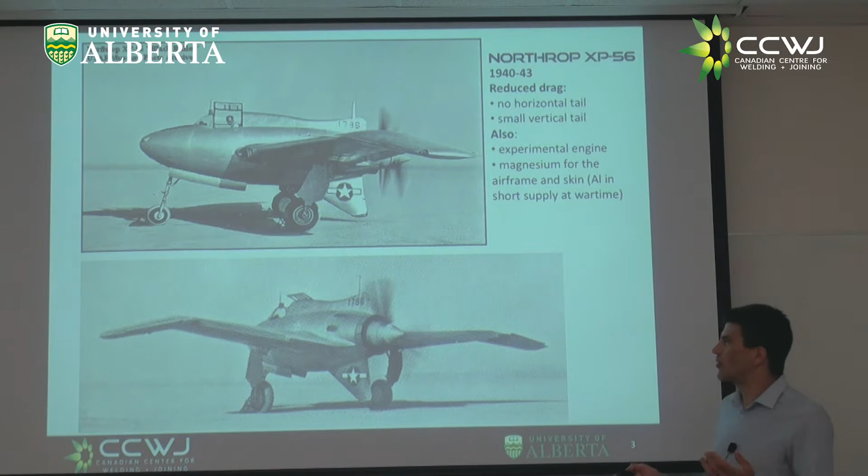But guess what? They had no way of welding this. They were barely, World War II, I showed you how people didn't even know how to weld ships. And now they wanted to weld planes, wanted to weld magnesium planes. All right, anyway, they figured it out. Of course, this plane didn't make it to the battlefront.

Look at this other one. They thought, okay, the idea we still are not sure we're going to use in battle, let's take it to the next level and put jet engines. And how about if we put the pilot prone? And this is funny because they put like as if it is the Germans trying to ruin like an American bomber. But in reality, these are the Americans. And the plan was this plane had no machine gun, had no missiles, had no nothing. What you would do with the pilot going first head would break the tail of the other plane just by ramming into it. And of course, the pilot was assumed to survive and hopefully land.

Well, let me tell you, not only they didn't build this plane, but at one point they realized that maybe having the pilot go head first into crashing into another plane is not a good idea. So there's another iteration of this plane in which the guy is sitting. Still a horrible idea, and still the plane is made of magnesium. But I guess if you're going to be suicidal, you don't care if it's going to corrode, right?

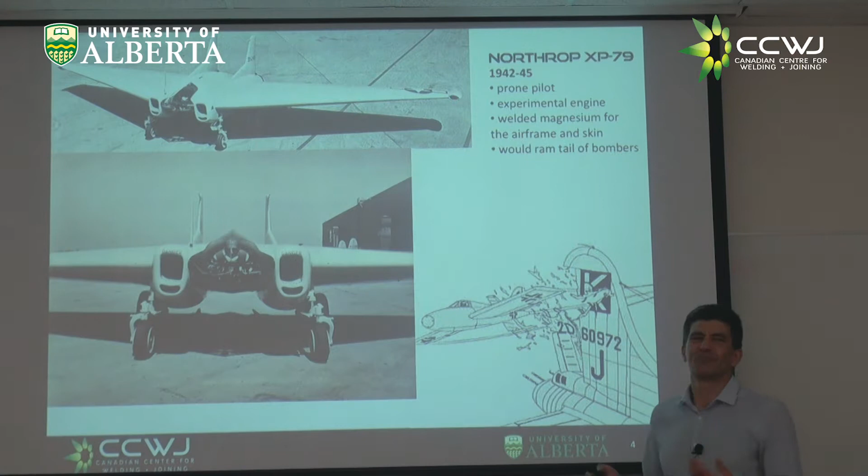So anyway, they needed to put this together. And what did they do? They invented what today we call TIG. And this was invented for welding this plane. Today, this is one of the essential technologies we use in this profession. If you say TIG, everybody will know what you're talking about, because everybody at NAIT, SAIT, and everywhere else, they live and die by TIG.

And of course, I'm saying TIG, but I write GTAW. That is the official name. Some people say GTAW. Again, welding is full of mysteries—who came up with this name and thought it was a good idea? So this, if you go to SAIT or NAIT, this is among the last things they'll teach you, because it's very difficult to do by hand. But it's the easiest to explain. So I decided to start here because it's easy to explain.

So in this process, you have the electrode. You have the arc of arc welding. This J thing here is the arc, and the arc goes between two electrodes. Here's one electrode, and the other—in reality we don't call it an electrode anymore, but that is the plate.

Remember when we talked about how if you have molten metal in contact with the oxygen of the atmosphere, it's going to end up looking like Swiss cheese? And I know this from experience. So you put inert gas. This K here is the shielding gas, typically argon or helium and argon, but typically it's a pure inert gas or a combination of pure inert gases.

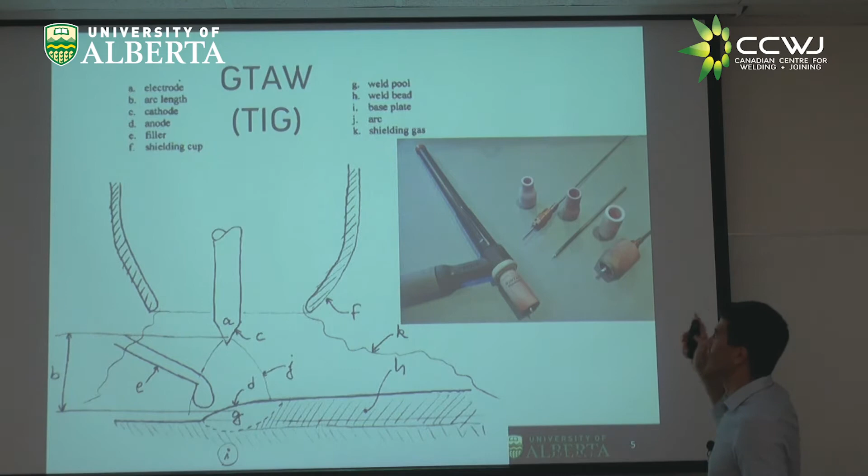So gas tungsten arc welding, which I'm going to call TIG. So I already mentioned the protection from the melt. And the reason I put this in this sequence is because I'm going to show you a ton of welding processes, and each process has a way of protecting from the atmosphere that might be just like this or might be different. This is an important aspect.

The filler material—you can have no filler. This would be an autogenous process, in which the joining of the atoms is done by the melting of the base material itself; you don't add anything else. But you can have external filler, which could be the same as the base, or very similar to the base and would be homogeneous, or could be different and would be heterogeneous.

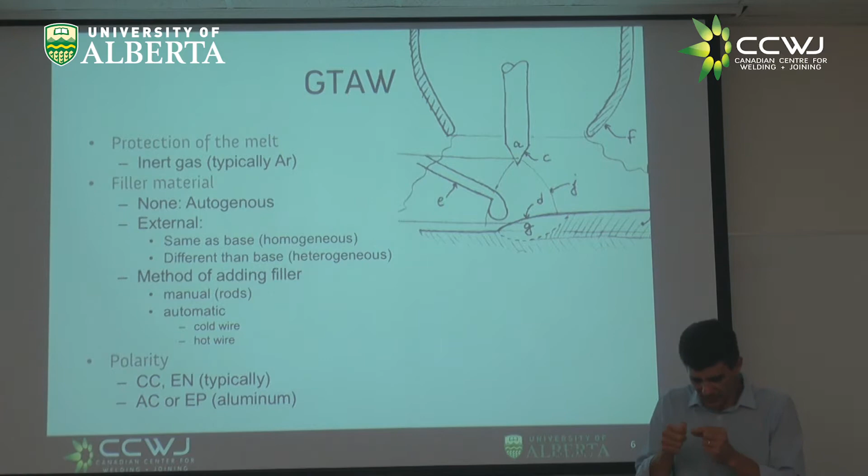You can add filler. The way you would add this filler could be manual. You make a little rod, and the welder goes like a sewing machine—they go with a TIG, melt a little bit of the plate, bring a little bit of wire, melt plate, wire, melt, and you see them working like this. It's quite awesome—that's manual, with a rod. You're going to see when you name the electrodes, they are called ER70S, for example.

The R stands for rod because you can use it for TIG. Or it can be automatic. You can bring this from a machine, and it pushes the wire for you.

If you just push the wire in without touching the weld pool, that's called a cold wire. But if you make the wire touch the weld pool, the molten metal there, the Joule heating from another power source circulating current through it would heat up the wire, and that's called hot wire.

Polarity. You're going to see lots of things about polarity, and this matters a lot. When I started my research in welding, I thought, who cares about polarity? But I'm going to prove to you later on that polarity matters a lot.

Typically in TIG, the polarity is electrode negative. There are good reasons for this, which I'll teach you later. The electrode is negative, and you typically use constant current, not constant voltage.

In constant current, the intensity of the arc—remember the arc is very hot and generates a jet about the same speed as a jet plane—this jet has about the same intensity if it's constant current. So you can be a little closer or farther from the weld, and you always have the same jet.

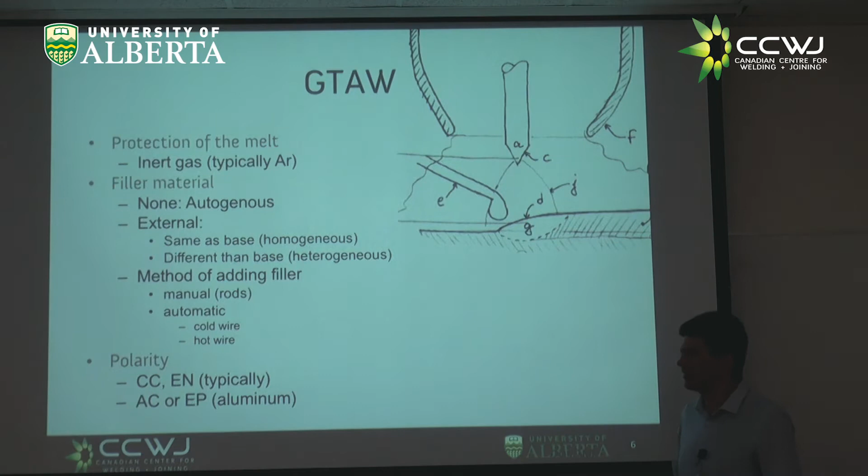Other things: in aluminum, sometimes you have AC, electrode positive, very, very seldom, only if you have no other way. AC means alternate current or variable polarity. You're going to see in the lab what happens with aluminum.

Aluminum isn't that it doesn't get rusty and doesn't oxidize—aluminum does oxidize. What happens is it has this protective oxide layer. Now, when you weld, what you weld is the metal, not the ceramic, the oxide layer. So the oxide layer is your enemy.

For reasons people don't really understand, when the electrode is positive and the plate is negative, that breaks the oxide layer—nobody knows exactly why. But if the electrode is positive and the plate is negative, you get what's called a cleaning effect in aluminum. In steel, you don't really need that, because steel doesn't have this really strong oxide layer on top.

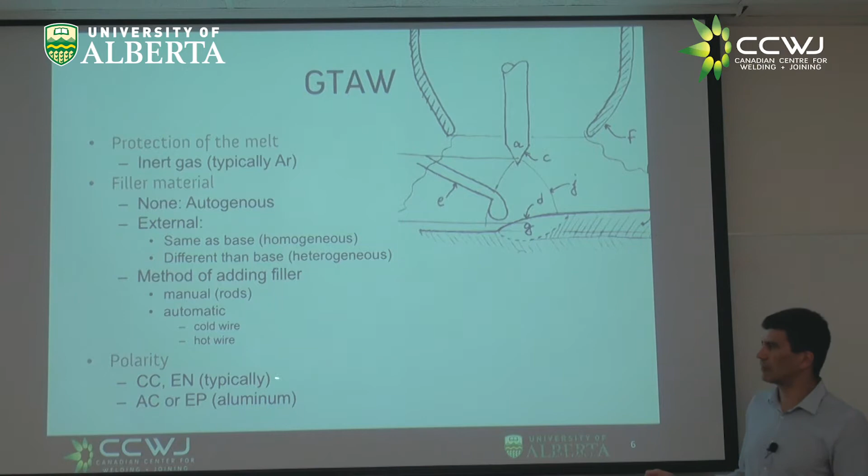So you have different levels of AC, and different levels of cleaning of the aluminum. You're going to see that difference between steel TIG welding and aluminum TIG welding. As I talk about polarity, I'm leaving aside many details about the physics of plasmas, which we will discuss. For now, take me on faith about these polarities.

What characteristics does TIG have? You require high manual skills. I'll give you an example from our lab.

I'm the professor, but I didn't have the best car in the lab. The best car belonged to one of the students who was a welder. He would weld during the summer and be an engineering student the rest of the year. The money he made welding during the summer was good enough to buy an Audi, pay his mortgage, pay his mom's mortgage, and go on fancy vacations. Isn't that crazy? And that's because he was a qualified TIG welder.

That is the highest level. So when you make pressure vessels and those, you use a lot of TIG, and very few people are good enough. Those are paid like surgeons. Isn't that crazy? So you can make sophisticated welds with this.

TIG is a little bit like a scalpel. You can do accurate operations. You can do small details.

So if you're making a race car, it's TIG welded. Parts of airplanes, TIG welded. Rocket engines, TIG welded. You can have very high purity here because everything is very controlled. You're not bringing in new wire, you don't have fluxes, and you don't intentionally introduce any oxidizing component.

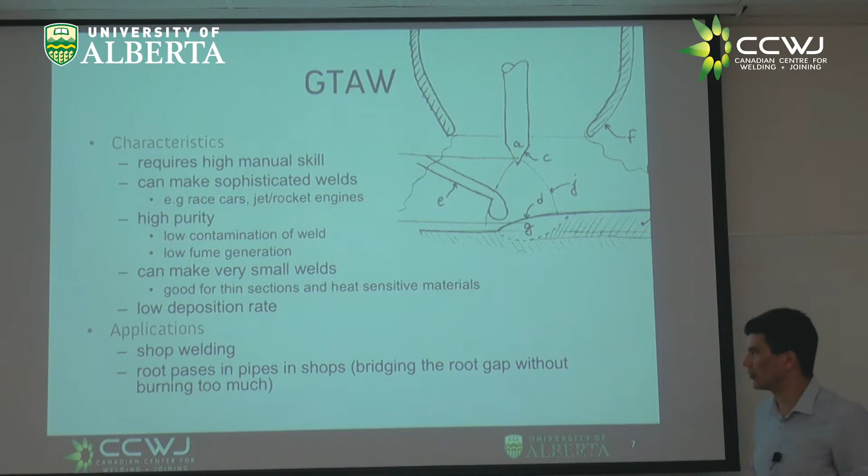What do you use it for in this province? A lot, the root pass of a weld. At the weld, the bottom of a V groove, you have the root, and the root is relatively thin. So if you come like an animal with something that has lots of heat, you might ruin it. So with this, you have really good control of how you're going to attack that root. And that is TIG.

Yes. Oh, yep. Hold on. I forgot, I need to give you sound here. Now I'm going to show you a video that is descriptive of TIG, and I believe we have sound. I'm pretty sure we have sound somewhere, as promised here.

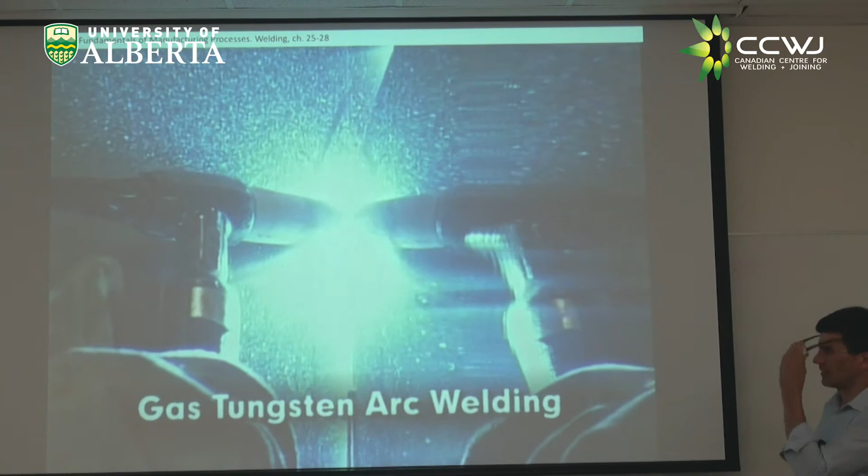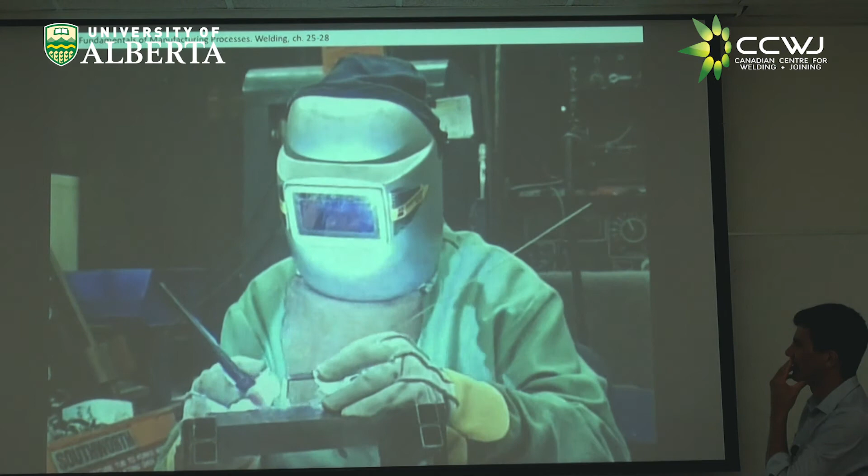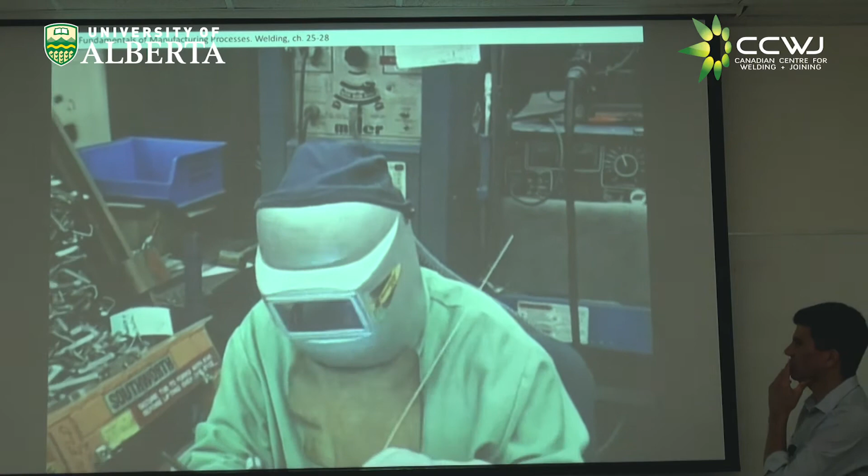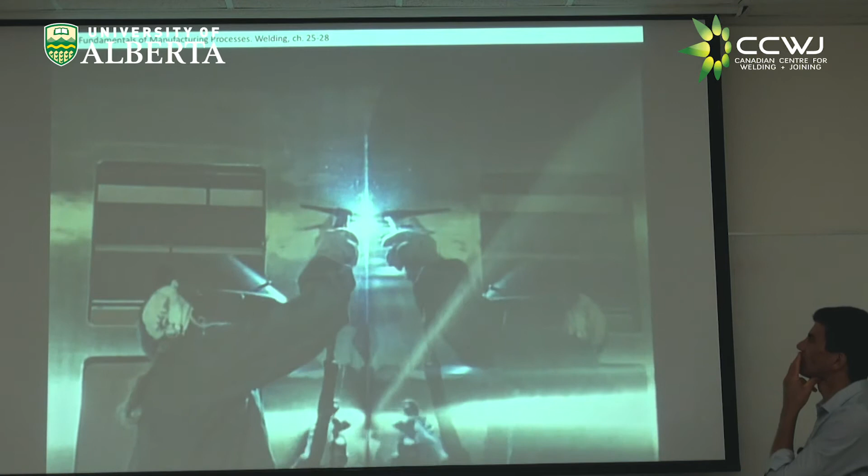Gas tungsten arc welding uses a non-consumable tungsten electrode and externally supplied inert gas shielding. The most common shielding gases used are argon and helium, and mixtures of the two gases. All types of steels and most non-ferrous metals can be welded in all kinds of joints and positions. Depending on the application, workpieces can be welded without a filler metal or welded with a filler metal supplied separately to the joint. Gas tungsten arc welding process employs either an alternating current or direct current power source, depending on the type of metal to be joined and its thickness. Some power sources provide pulsating direct current with variable frequency. These adjustments allow better control of the molten weld metal when welding thin sections and when welding in other than the flat position.

All right, there you go, like an introduction. This is a video typically aimed for the trades, but at least you get to see how it was used. By the way, when you see the people in our province, they look a lot more skilled. They were just putting the torch against it, you don't do that. Our guys are really sophisticated.

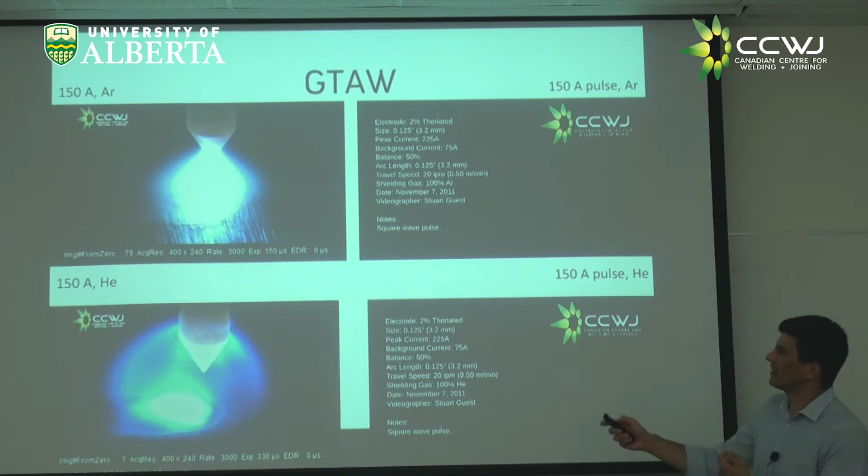Okay, so let me show you some videos we took in our lab of TIG welding. Here, this is 150 amps in argon. I'm going to put them all here, here, and here. So these are videos, they look like photos, right? Because nothing is moving. But in this one, you can see how it is. Here in this one, you get to see how it changes.

Remember when we talked about constant current or constant voltage, and then I mentioned advanced waveforms, because now that the things are like a computer, you can tell it to pulse high here and low there, high and low. So in this case, we're just pulsing high and low. When the current is high, the arc swells up because it's taking all this energy through. When the current is low, it gets smaller. I'll tell you more about pulsing in a second.

You see this other one that looks ghostly? This is in helium, pure helium. That's very uncommon. Sometimes you would use helium, but there are pros and cons. Helium is very expensive and non-renewable. Argon comes from the air. You get to see how the arc looks quite a bit different. The physics of the helium has significant differences with argon, and we're trying to understand those right now. The physics of the plasma are not so well understood.

Why would you want to pulse? For many reasons. One of those is aesthetic. There are some types of welds in which people like to see what they call a stack of dimes. Imagine you have a stack of dimes and you tilt it, and it goes like the scales of a fish. Some people like that finish. So if you pulse it that way, you get that finish.

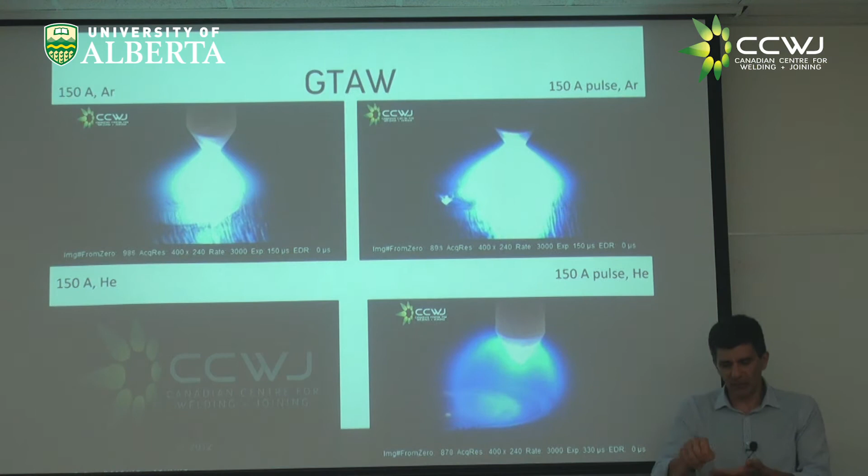The other reason is sometimes you want to have good penetration, but not too much heat. So every time you pulse, it's as if you dig a little bit, and when you don't pulse, you're not digging. So when you pulse, it would be a sequence of spot welds, pretty much. Those are decisions that are made depending on considerations of aesthetics, heat input, or preference.

In this class, you're going to see many of the aspects that help you make those decisions, although very often they're kind of mysterious in the way they are taken.

In TIG, there's something called the gas lens, and it's interesting - we have one Mickey here, I believe. Who's that? You, okay, welcome. It's two. No, Mitch is there too. Three, Louis. Oh come on. Okay, so we can come out of the closet then, huh?

Remember I mentioned we want to separate molten metal and oxygen of the air, because that's bad. One of the ways is you put an inert gas, for example argon or helium, whatever.

Now, when you're blowing a gas, as you guys know, the flow can be laminar or turbulent. If you want it laminar, that's typically related to slow velocities. But if you have slow velocities, it means you have little gas. So some people say, oh, I'm going to give it really good shielding and open up the tap, and they're blowing argon like crazy, spending money like crazy. And guess what? It goes from laminar to turbulent. Now you're worse than before and more expensive than before, because you can do everything worse if you don't know what you're doing. Now, smart people realized that if you put something called a gas lens - which has nothing to do with a lens, I don't know why they call it that -

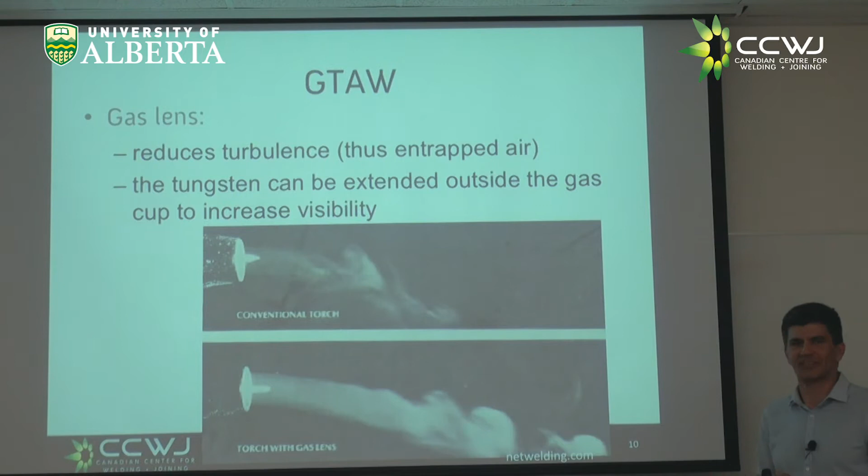All these things can take days and many thousands of dollars in delays and problems with the products. But it's not going to happen to you guys, you're going to be awesome. And by the way, they don't teach you all this when you learn to weld properly - they just teach you to weld. But this type of thing is for good welding engineers to know.

Remember what I mentioned - you can add the wire by hand, as you saw in the video, or automatically, feeding the wire from a feeder. One of these techniques is called hot wire, and this is a photo of the patent. Funny enough, this guy is still around - this looks like the Victorian era, right? But this guy is around. He's August Manz, who until not long ago was in charge of the AWS welding handbook.

And what did he invent? Here you have your TIG torch as usual, and here you have the wire they are adding - it's coming out of a spool, and the wire comes in. Now, what is not shown all too clearly here is that it says power supply and power supply. This power supply is a power supply for TIG - everybody has one of those because otherwise you cannot do TIG. But let's say we have two power supplies now.

We have power supplies like this in the lab, we have 2 of those. So you have an extra power supply, and now the current would go through this wire from the workpiece, the plate, through this stretch of wire. You see this little line here? This is super important. And then this other part here is called the contact tip and goes to a power supply. All these are big, beefy cables, this is a big, beefy piece of copper. This is just your everyday welding wire.

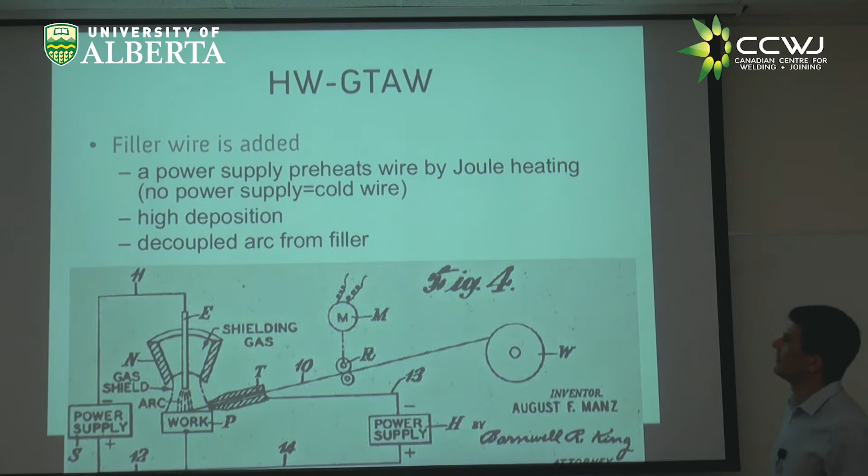All right, let me show you a video of this process in action. So this is a video from our lab. This is our TIG electrode, made out of tungsten. Tungsten has a very high melting point and also has a property of being thermionic.

Now, here you don't see it all too well, but you see this ghostly image here? This is the hot wire coming in. And you know it's hot wire - you see how it's already kind of molten as it is coming in? It's not coming in straight and strong. It's coming in already molten because you have the current moving.

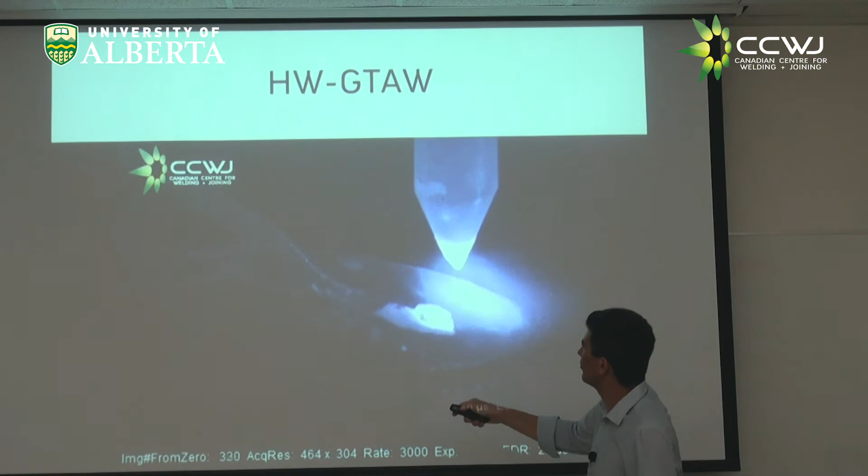I'm going to show you one more thing, and it should blow your mind. Look at the arc, yeah? Oh. You see? I want to know what's going on in there. What's going on?

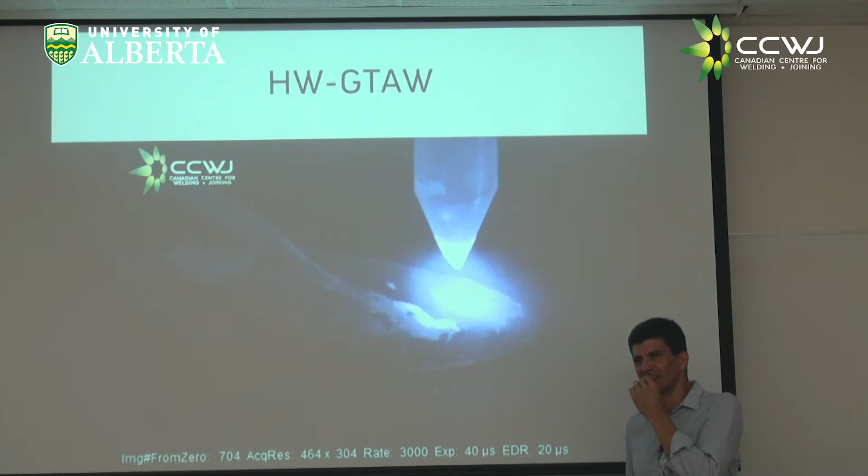Okay, who said that? Okay, you say polarity. What do you mean by polarity? Like you have 2 power sources, right? Match them so you don't make a short circuit. Right, but to be clear, you said polarity, but in both cases, the electrode here is negative, the plate here is positive, and that did not change the polarity.

Here, let me think. I believe here the wire is negative and the plate is positive. No, the wire is positive. Here the wire is positive relative to the plate. But the polarity did not change. What changed? But you're onto something.

So we have what is called arc blow, and it's an electromagnetic interaction. It's such a pity you guys didn't have electromagnetics, although a few of you did. So this is a story. This arc is fine, but here we have another electrical current. This is not going to have much of an effect on something that is so strong.

But this guy has a current, and this current generates a magnetic field. And the magnetic field interacts with this current and generates a force. And it happens that this is a pulsed power source - it's not variable polarity, but it's pulsed. So the current is going like that, I believe. So when you have this current interacting with this current, the two opposite currents repel each other. And so here the current is coming like this, and there it is coming like that.

They repel each other. That's called arc blow. This has not been a problem here, but very often, if your plate is magnetized or something like that, it's going to move your arc. And the welder has a really hard time, because if they want to weld this one point and the magnetic fields move their arc, they cannot do it.

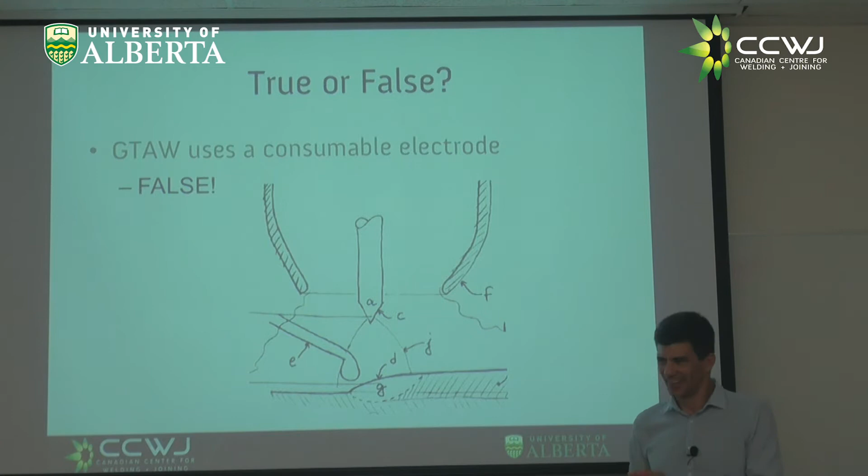Very interesting. Okay, true or false? Gas tungsten arc welding uses a consumable electrode. False, thank you guys very much. Of course, unless you're like me and you change the polarity. If the electrode was positive, let me tell you, you melt the electrode. But you shouldn't.

As you blow this primary gas at a pressure, you make an arc that is constricted. If you remember the arcs that you saw in the videos about TIG, they were like a bell - like a Liberty bell, big. But in plasma, because you're having this primary gas blowing very strongly here, you constrict the arc, and the arc becomes even more of a scalpel. Now it becomes so narrow that it can compete with laser. It can be very, very focused.

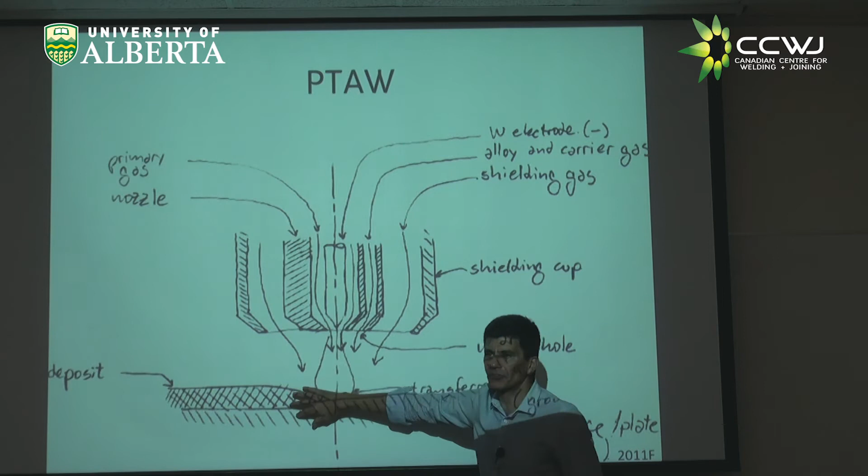Now, what we do in this process, in addition to this plasma process, is we have a third flow of gas that is called the carrier gas. And this carrier gas can bring powders, and we can then deposit powders and do additive manufacturing, or put corrosion protection coatings, or wear protection coatings. So you have a third flow of gas. And here, in the nozzle, you would have either 2, 4, or many holes, and the gas comes out of here, gets molten in the arc, falls here, and you have a process in which you have a filler metal - but you have no wires or anything like that. You're going to see this in action.

Okay, protection of the melt, again, is a shielding gas, typically argon. Sometimes they put a little bit of hydrogen. We're going to see that hydrogen gives you a hot arc, and also is a reducing gas. On the other hand, hydrogen is typically very bad for steel. So if you're going to do it, you have to know what you're doing, so you don't end up with hydrogen cracking.

So the filler metal, typically, it is heterogeneous powders - mixtures of nickel and tungsten carbide. But the base is steel. You put on this carbon steel, nickel and tungsten carbide. You can use things that are like corrosion protection powders.

Typically, you do this only in the flat position. Anybody remembers what we call the flat position? What is flat position? Is this 1F, 1G? When you're doing overlays, or cladding, you have no fillet and you have no groove. I don't know, but it's position 1 - flat. You seldom do it in other orientations, and the reason is you put such large deposits that they would fall. So this is typically constrained to the flat position.

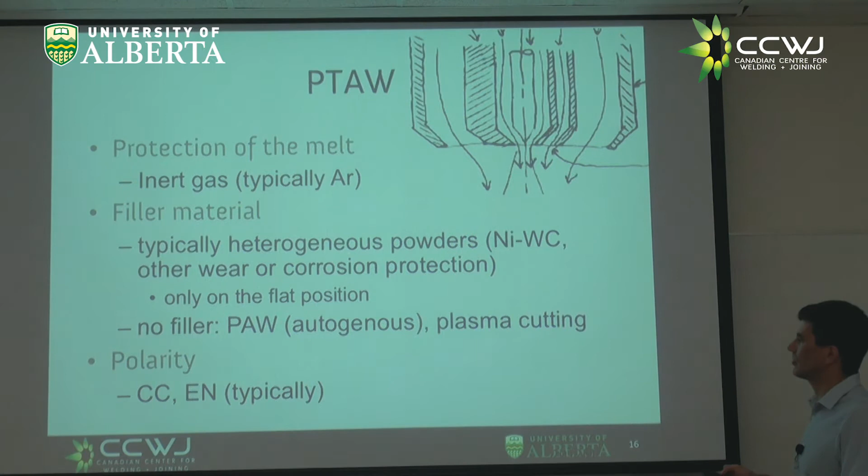Characteristics very similar to TIG, but more concentrated, can create a keyhole. Remember, we also mentioned briefly what a keyhole was when we were talking about the terms.

Remember also when we talked about the relationship between intensity of the heat source and the human response time, and how we can do oxy-fuel welding by hand. We can do MIG and TIG by hand, but we cannot do laser and electron beam by hand, right?

Plasma welding is the first one that you cannot do by hand, right? It's right at the limit in which you cannot do a good weld. It's too small, moves too fast, just a bit more than you could. And of course, I'm sure if you try, you could in some conditions. But typically, you don't do this by hand because of the intensity of the heat source. So this goes back to what we discussed in our second lecture.

Because you can make smaller beads, right? Sometimes you put lots of material, but you put it flat. But you can make details, even smaller details than with TIG. If I make a very small detail, what do you think? Am I going to cool down fast or slow? Fast, right?

So some materials are heat sensitive. For example, mixtures of nickel and tungsten carbide. Tungsten carbide is a ceramic. You mix it with nickel. You melt the nickel. You don't want to melt the tungsten carbide. That's fine. But the tungsten carbide might want to dissolve in the nickel, like the same way a sugar cube dissolves in your coffee. So now, if it cools down very quickly, it dissolves very little.

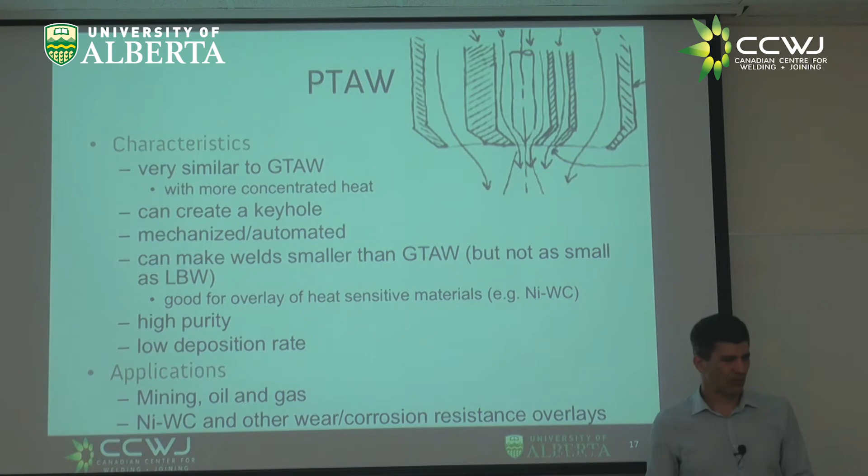Yeah, so let me show you in plasma arc welding, a video here.

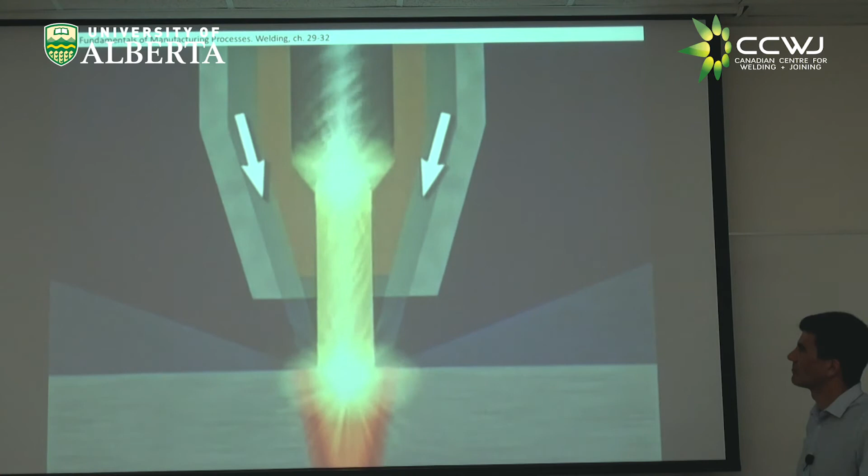Metal coalescence is produced by a constricted arc made up of a high-velocity stream of ionized gas called a plasma. In most plasma arc welding operations, the plasma jet is generated by heating the orifice gas in the torch plenum chamber to a plasma and forcing the plasma to exit through a constricting nozzle or orifice. Partial shielding is obtained from the plasma and is supplemented by an auxiliary shielding gas. Auxiliary shielding gases used include argon, helium, or mixtures of argon with hydrogen or helium.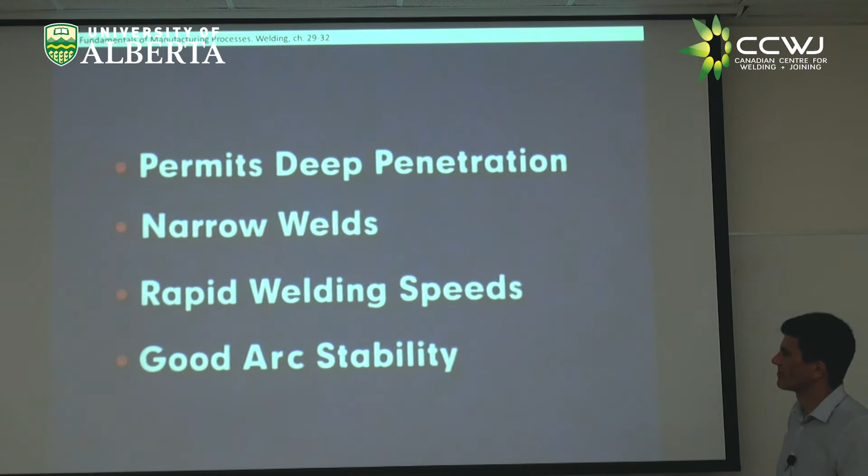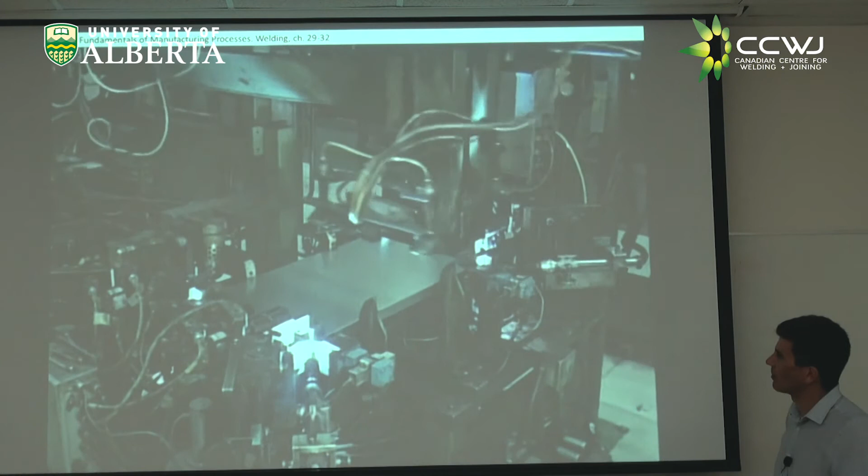Because of the constricted arc, the heat energy of the plasma stream is concentrated and extremely intense. This permits deep penetration, narrow welds, and rapid welding speeds with good arc stability. Workpieces can be joined with or without filler metal. Plasma arc welding can be used to join most ferrous and non-ferrous metals, including extremely thin materials such as foils. Plasma arc welding equipment cost is high, however, so the process is often limited in its application.

Question: why did you mention that you can weld thin foils with plasma? Why plasma yes and TIG no?

There could be a few reasons. Good answer, you sound like a materials person now. With the temperature control is better and your arc is much constricted and targeted, I guess. It's easier to get a cleaner weld and not break the material while doing it.

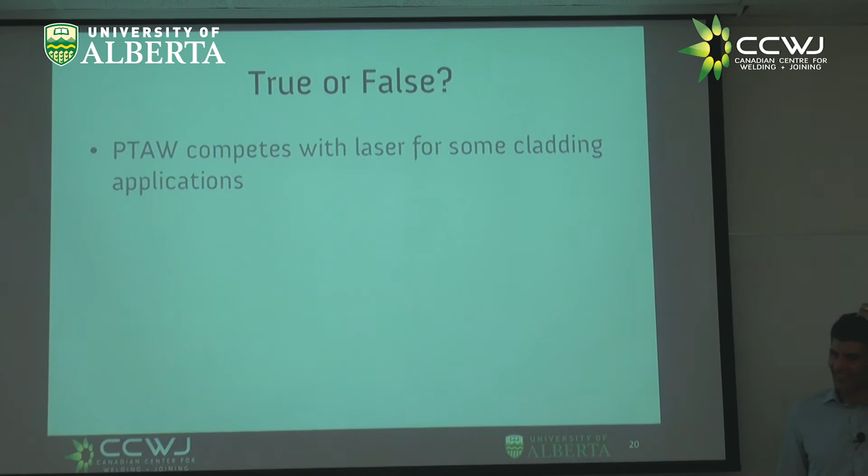All right, true or false? It's true, it's true.

PTA has such concentrated heat that it competes with laser for many applications. Now, there are things lasers can do that PTA cannot. But when you have a laser, typically you have such a streamlined operation - clean, good engineers, you know what you're doing. So very often people use lasers for things you could do with PTA, but the reason is you have customer service and a supply chain you can trust. But I believe PTA is something that deserves attention.

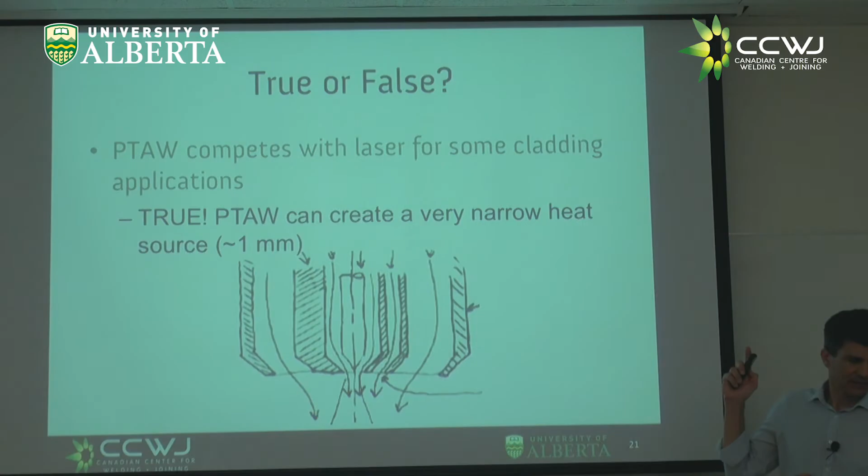All right, this is for non-consumables. I will talk next about consumable electrodes, but do you guys have any questions or comments so far?

Who has seen TIG in action? Who's aware of having seen TIG? You did? Okay, did any of you try it by hand? No? You did? How good are you?

When I was a professor in Colorado, we decided to create a bicycle building club, and I was the professor of welding and students. One of the students started making bicycles overnight—he was making bicycles for his father-in-law, friends and neighbors. It was amazing. I have the samples I tried to do.

I don't make bicycles, I talk about welding, but it's very difficult—almost uncontrollable. The moment the arc is produced, you have to be right there and focused on where you're going, otherwise you go in the wrong direction. You wanted to be an engineer, but some guys love it, it's like being a musician.

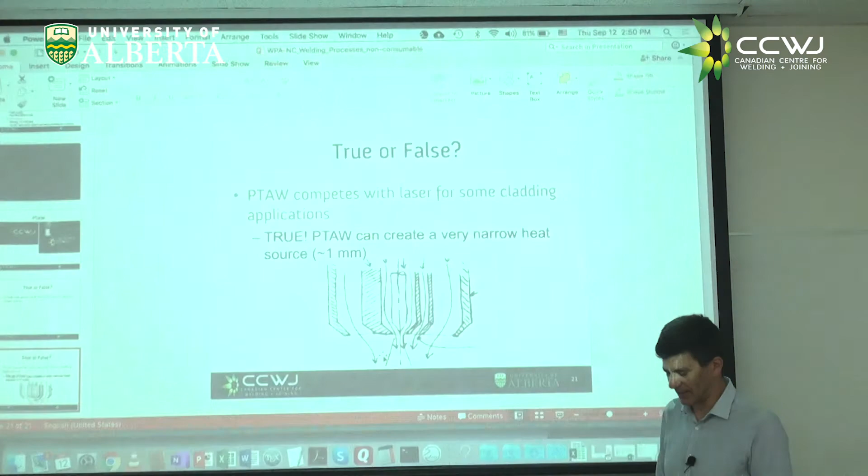But I don't know, they have a robot for a hand, I don't know how they do it. If you hold a TIG torch, if you join the lab you'll have a chance to do it, but we don't plan to do it for everybody in the class. You're going to see that it's really difficult. Have any of you tried applying silicone in the bathroom? That's difficult already—this is next level. I was doing that last weekend, and another job I shouldn't take.

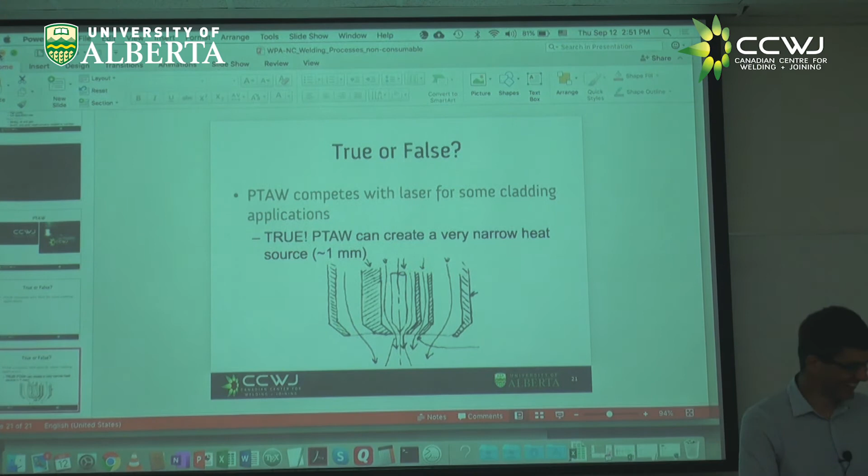Consumable electrode. Now I'm going to talk about things like MIG, and I say MIG, but I write GMAW. Here's a subtlety: GMAW is one thing. MIG would be GMAW, but for Europeans, MIG specifically means gas metal arc welding with inert gas. And you have to know that. In the notes I uploaded, there are all these acronyms explained.

It used to be called metal inert gas—gas metal arc welding, metal inert gas, when you use argon. Now you might use CO2, which is not inert, so they would call it metal active gas. Europeans still call it MIG and MAG, and they care very much about the distinction. So if I would say GMAW with CO2, no problem. But because I say MIG with CO2 instead, the Europeans say that's nonsense, that's MAG. Fine, whatever, sue me.

But you should know this: I'm going to say MIG, but in reality I mean gas metal arc welding, and I never say MAG, but maybe I should. So look at this drawing—it's much the same as the drawing for TIG. We have a plate, we have an arc, we have an electrode, and we have a shielding cup or a nozzle. In MIG you call it a nozzle; in TIG you call it a shielding cup. But it's the same thing.

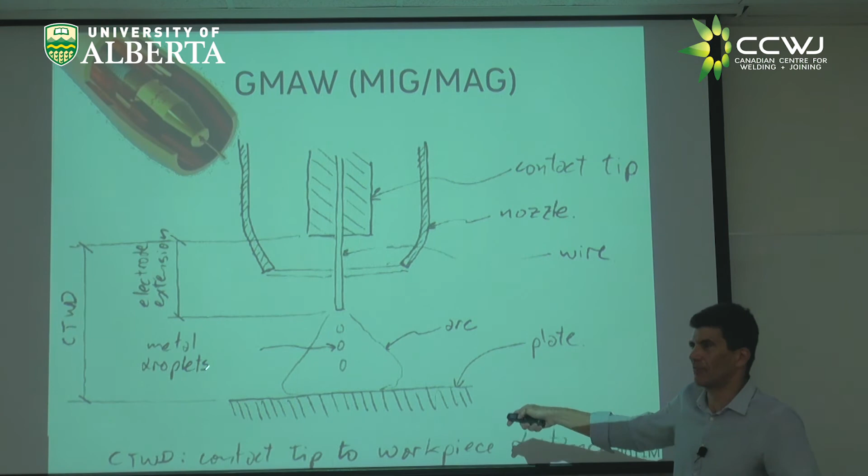This wire sticking out is called the electrode extension, and it's very important. This line here in reality is not so sharp because I didn't mark if it's above or below the melting droplet. I still don't know how to call it, and there's big debate in the community about what is arc length and what is electrode extension. For now, I made it fuzzy enough, and I'll be okay if you give me an equally fuzzy definition.

Now, question to you. I have taught you nothing about physics, nothing. But if I keep the same contact tip to workpiece distance, because I put my MIG torch in a machine, and I increase the voltage, what do you think, how do you think these lengths are going to change?

So the machine uses higher voltage. Shorter, what is shorter? I agree with you, why? Because the power you consume is more, and the chance to heat the wire is faster, right? So the extension is... you're onto something, but I said higher voltage, and you say the power is higher. Okay, good, sorry, so he's right.

Now the reason this would happen is that most of the resistance happens here in the plasma because it's a gas. The metal has little resistance. So if you want higher voltage, typically what the machine does is give you a longer arc. And we can calculate that.

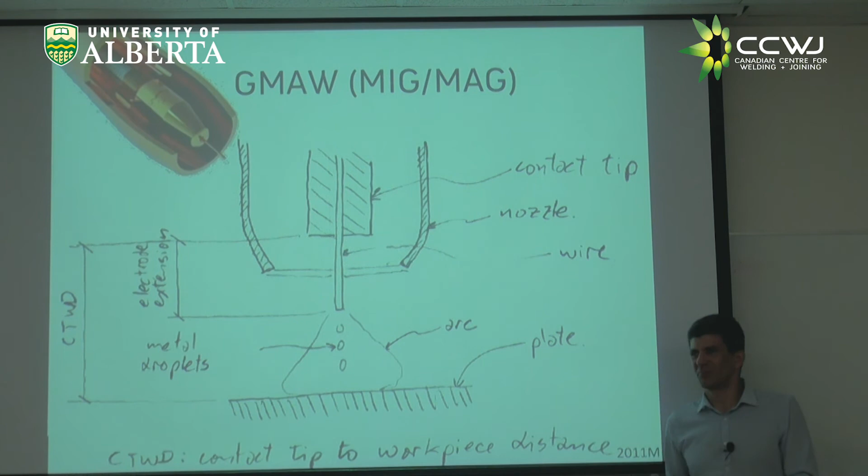Why do you think we might want to run constant voltage? To control the arc. Right, if the voltage is constant, I have the torch in my hand, and I can come in and out and do things that as a human have little variations, but the arc is always the same length. You would not want to come in and out and all of a sudden the wire starts sticking out. I have managed to do that myself despite the constant voltage, but proper welders don't have that problem.

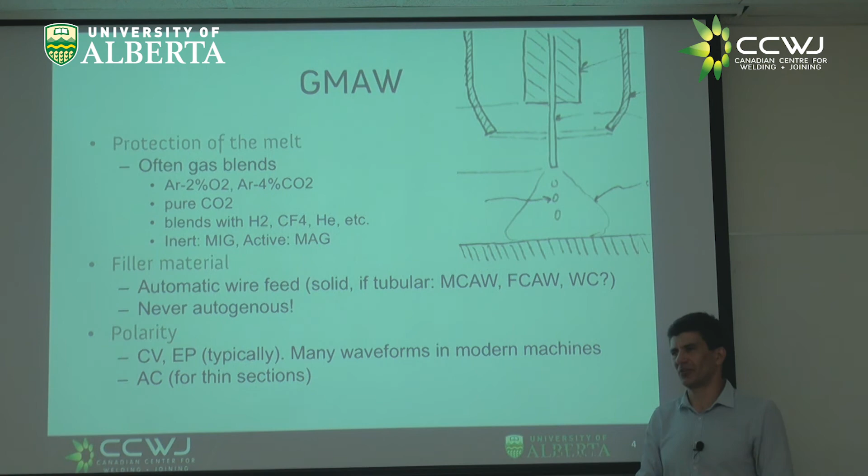So think how different these things are and how different the machines are. In the past, the machines had completely different electronics, because some electronics were for giving you constant current, a current source, and others to give you constant voltage. Today the machines, because they're a computer that happens to give you electricity, in reality are all constant current machines, but they fake it to make you think it's constant voltage, or it can be constant current, or anything in between.

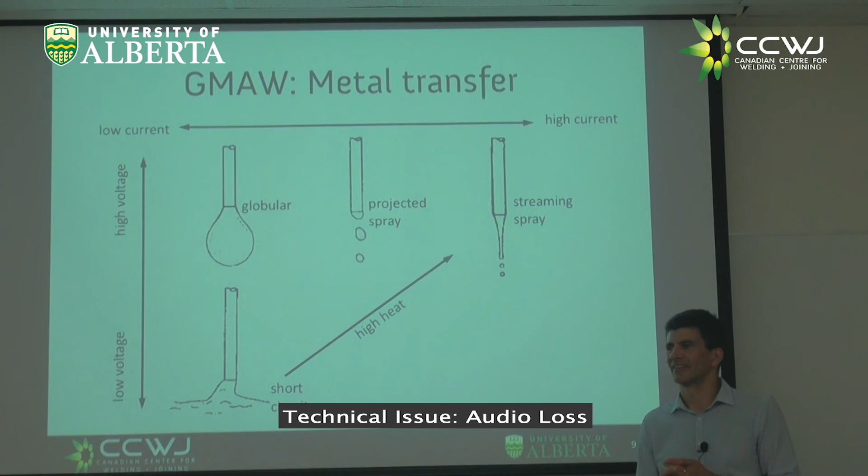Have to pass a certain threshold current to make the transfer happen? Yes, it happens much faster. Why? By what you said, obviously, if the current's really high. Yes, but why? Does it have to do with capillary? Not capillary. Well, capillary plays a role, actually, but capillary opposes the detachment. So what pushes the detachment? If I have smaller droplets, I have higher capillary force, so here I have higher forces for detaching than there.

What force would be stronger now, here than there? Who said that? Electromagnetic. So in welding, current typically goes associated with electromagnetic forces. And isn't that funny? You don't need to know how to read and write to be a good welder, but to understand welding, we're talking about more things than you have been taught. So electromagnetics matter a lot.

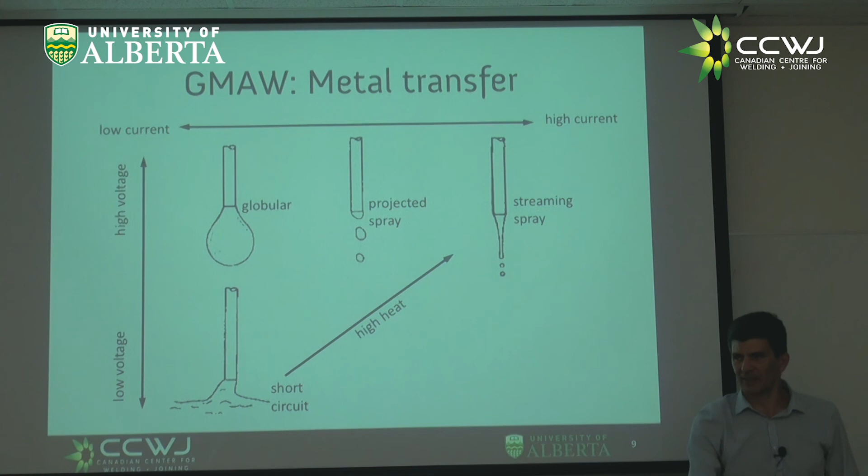So there is something called the pinch force, which we're going to see later. But the bottom line is this force that tends to squeeze things, called the pinch force, goes with the square of the current. So at low currents, pinch force is low, it's just a drippy faucet. At high currents, you start to squirt it. But it's kind of magical, right? There's nothing mechanically squirting it, it's just these electromagnetic forces.

Okay, so in MIG we have this same graph as before, but here we have where we would divide this. Welding machines tend to run here. Commercial welding machines, for example those called synergic, combine these. In MIG, you give a voltage, but you don't give a current, you give a wire feed speed. You say how much wire do you want to melt, so many meters per minute or so many inches per minute, and it burns that.

You said two things, you can set two things, but typically machines will try to think and say, you wanted low power, so you go here to short circuit at low current. You want more power, you go to spray. Typically you want to avoid globular, because globular gives you spatter, it's not as directional. When this says directionality, it's because this thing is like a laser beam, squirting. In the other mode, the droplets are falling more or less wherever they want.

I talked about power. You know that voltage times current is power, right? So the voltage times current constant would be this hyperbola that we didn't draw. This would mean low power here, higher power, and here you'd have lots of watts.

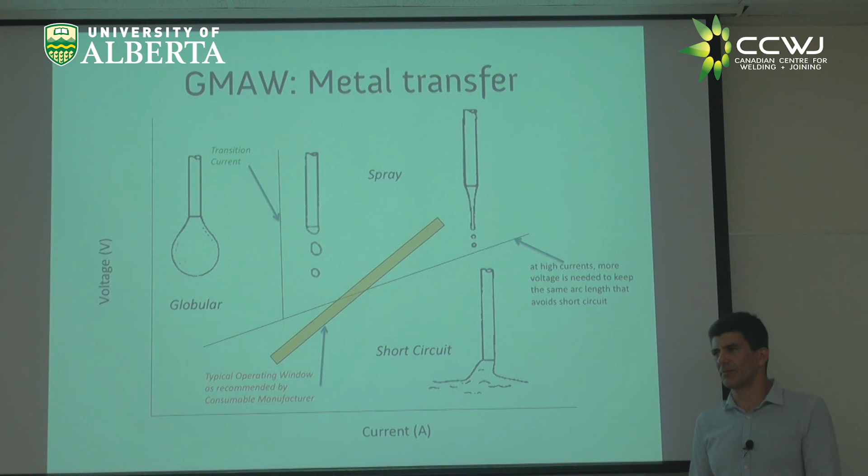But you're saying the practical things come from understanding, right? That's pretty cool. All right, we have a few more minutes, and I want to go over these metal transfer mechanisms. Let's start with globular. We already mentioned that it's like a drippy faucet in which you have the big droplet that detaches by its own weight. There's a definition that says globular is when the droplet is bigger than the wire. You know what, I don't care about that definition. Typically it's true, but what really matters is that the physics of detachment is by weight, which typically happens to be the droplet bigger than the wire. And electromagnetics are relatively small.

The droplets don't always fall straight down, sometimes they go to the left or to the right, and this is a problem because a welder needs to put the metal right in a place and the droplet goes elsewhere. So you also have high spatter because sometimes the droplets fall out, happens at relatively low currents, for reasons nobody really understands. I don't. Nobody can really give you a straight answer.

But if you use lots of CO2, you're going to have globular transfer no matter what you do. You go to high currents, still globular transfer. So now it's a funny trade-off. I want to use a cheap gas such as CO2, I'm going to end up with a pretty crappy metal transfer mechanism. Sometimes it's okay, sometimes it's not okay. But now you start thinking, can I deal with lots of spatter? Maybe you're making a weld that is so big that you don't care. Sometimes it matters. So high amounts of CO2, and by high amounts I mean amounts above 25% CO2, will give you globular transfer.

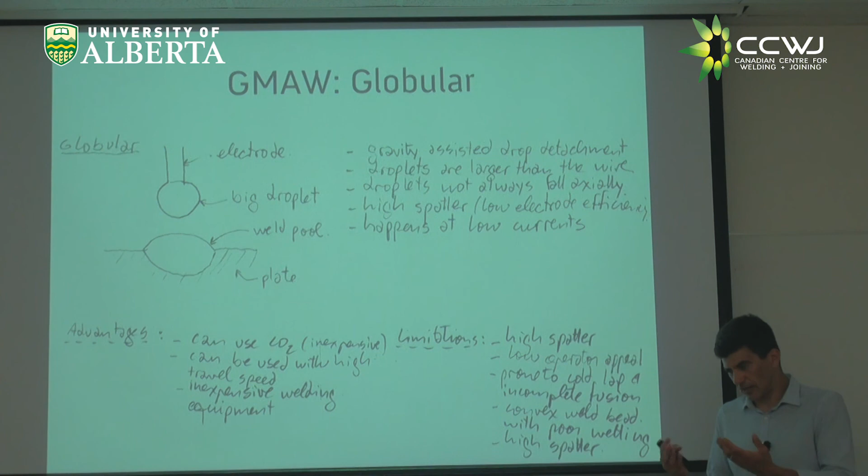Sometimes the big droplets here would fall, but they don't really melt the sidewall, the V-groove, and you have the effect that is called lack of fusion that shows up in X-rays. You don't see it with your eyes because you only see the cap passes.